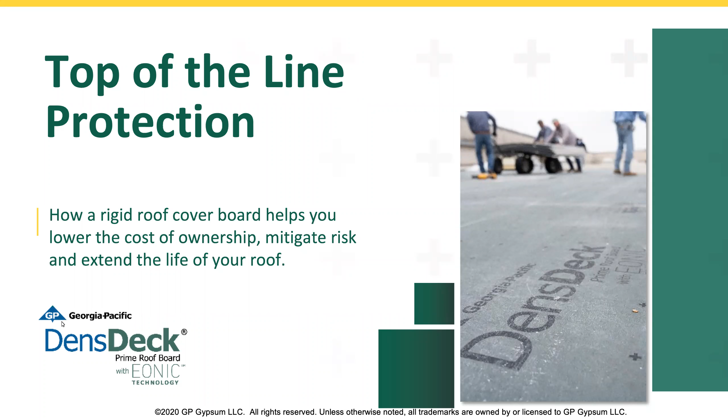So being a facility professional, whether you're a building owner or facility manager, is not an easy job. You got a lot on your plate. You have to prioritize resources and expenses on a daily basis. You got to deal with and worry about budgets, people, maintenance, all utilities, janitorial, training, uniforms, vehicles, capital projects, complaints from tenants. The list goes on.

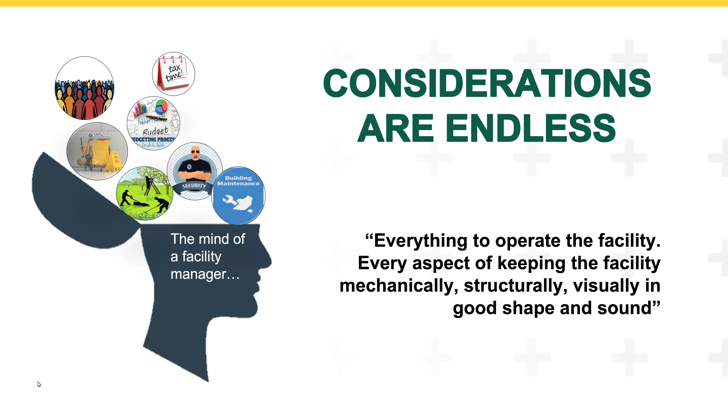And you even have to worry about that next storm that's forecasted to hit, depending on what's the state of your roof that you're managing. So you got to balance all these things while also ensuring that there's no disruption in the operation or the daily life of anyone in your facility. Definitely not an easy task.

So our Gypsum Insights group recently conducted a series of conversations with facility managers from across the United States with varying levels of asset responsibilities. Some of these guys oversaw individual buildings or a couple of buildings, while others directed massive medical and university campuses. So the quote on the page we thought was pretty interesting because it was from one of those conversations with a facility manager of a large university campus in the Chicago area.

So he said, if I blow my budget, then I'm going to be fired. In my life as a facilities executive, if I impact our students or our ability for faculty to deliver academics, then I'm going to be fired. If I impact our researchers and damage an experiment because something went wrong in the building environment, then I'm going to be fired. Those are givens with everybody in my role. We all understand that. So we thought this statement, while being perhaps a bit extreme, gave a really good glimpse into what keeps facility managers up at night.

So in our conversations with these facility professionals, the feedback they gave to the topic of, quote, what keeps you up at night, can be broadly summarized by the words on the page. And, to summarize, it's things such as managing and staying on budget, thinking about their workers and the labor that they have, whether it's around their safety and how they work, as well as just the problem of finding skilled labor. And then big categories, things that can affect the structural soundness of their buildings, such as water, fire, and weather-related events.

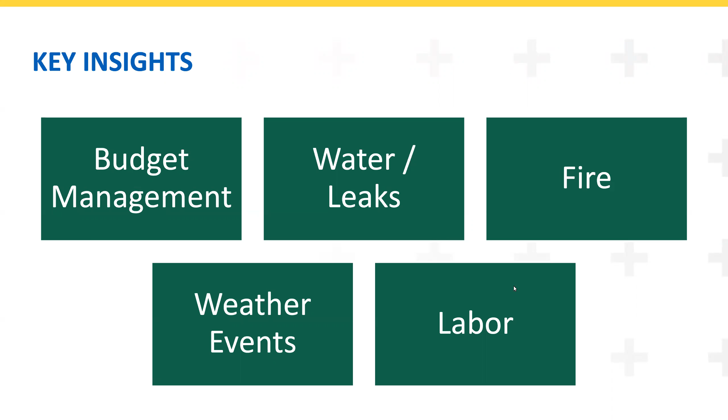So as I mentioned when we started, we want to spend some time talking about the roof of your buildings and sharing information about how using a cover board can be a benefit to give you peace of mind and help you address some of your concerns, at least when it comes to your roof.

So in addition to conversations with facility managers, early this year, Georgia Pacific partnered with FMI Corporation to conduct a third-party assessment of roofing systems that have been replaced in the last 5 years. What the data showed was that when compared to similar roof systems with a cover board, single-ply systems that did not have a cover board had anywhere from 35 to 65% higher annual operating and maintenance costs.

They had more issues over the life of the roof, and when those issues did surface, they were often significantly more expensive to fix. We'll touch on this subject a little bit more when we get to the benefits versus cost section a little bit later.

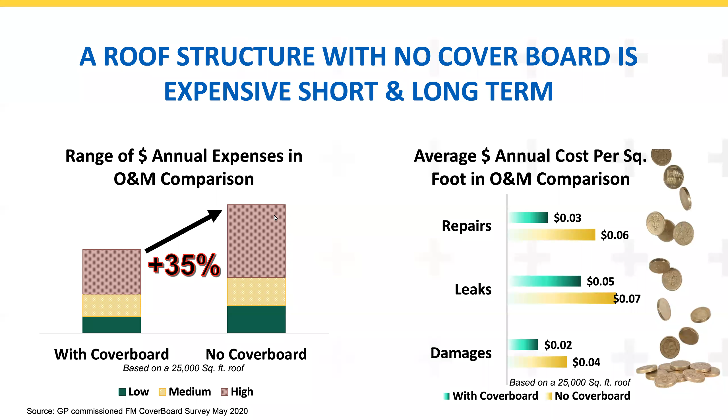So in addition to operating and maintenance costs, some other future considerations you might want to keep in mind for your next roofing project, whether that's a re-roof or a new building, are things like future weather hazards. We'll talk a little bit more about that in the next few slides. Do you plan to add additional HVAC equipment or solar panels to your roof? In other words, will you be increasing maintenance traffic or adding additional equipment hazards to the roof?

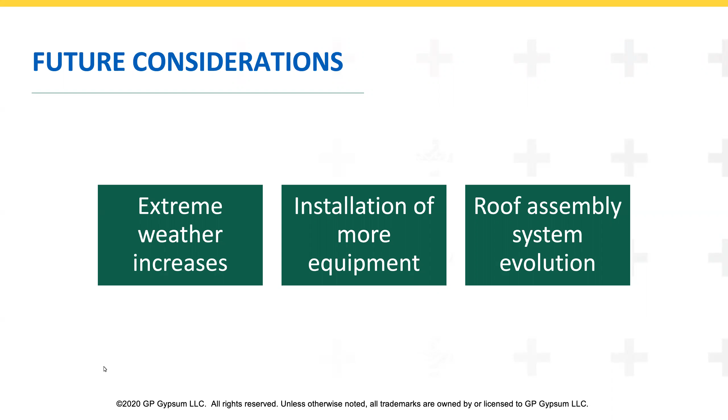And any future considerations for converting roof space into things such as plaza decks, outdoor entertainment areas or garden areas. If you have any of these future considerations, then a cover board should be a consideration that you're looking at as well.

One of the topics that regularly came up when discussing what keeps facility professionals up at night is weather events. Extreme weather and weather-related disasters seem to be a regular occurrence on the news these days. We're always hearing about unprecedented this and unprecedented that. But if we look back, since 1980, the U.S. has sustained 258 weather and climate disasters where the overall damage costs reached or exceeded $1 billion, which is how they define a disaster. The cumulative cost of these events for the past 40 years is around $1.8 trillion.

So $1.8 trillion, but in the last 3 years, disaster costs were up 43% versus the previous 5-year average and up 76% versus the 20-year average. Disaster costs from just the years 2017, 18, and 19, so just 3 years, account for over 25% of the disaster-related costs going back to 1980.

These disasters have impacted states across the country, in addition to U.S. Caribbean territories. In a recent report on disasters since 1980, NOAA concluded that the number and cost of disasters are increasing over time due to a combination of factors. Things such as exposure, which is the value at risk of possible loss. So you have more valuable assets that are in the way of these storms.

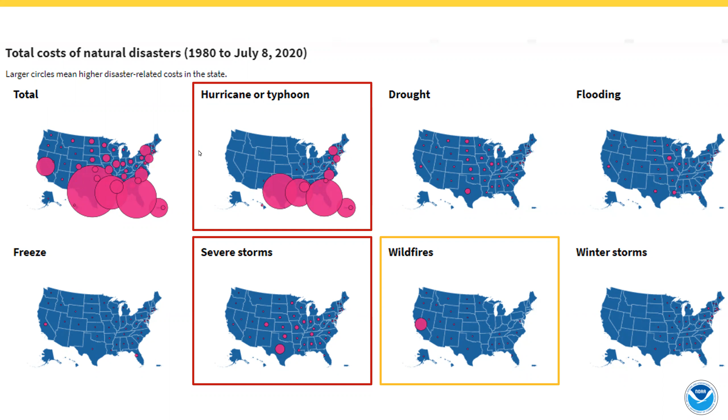So NOAA, like I mentioned, only tracks disasters that cause at least $1 billion in damages, which is why we've been talking about them. So again, talking about this trend that's been developing in the last 40 years, you can see that the number of billion-dollar events continues to grow. So since 2002, there's not been a single year with less than 5 major natural disasters. And since 2015, there's been at least 10 major disasters recorded each year.

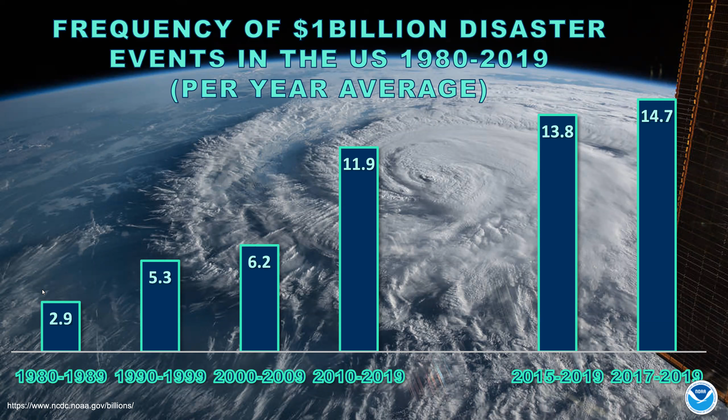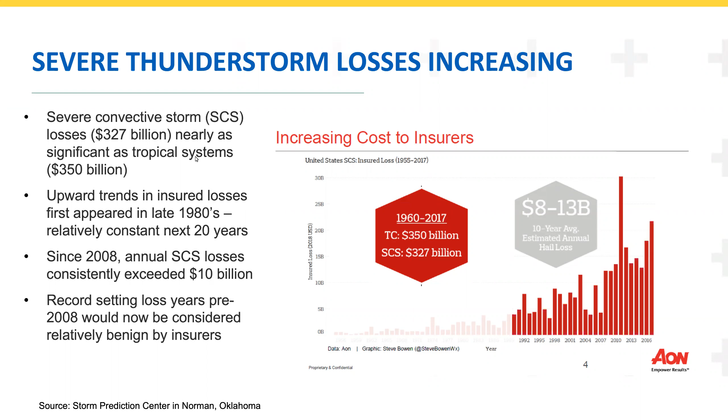So as you can see on the chart, insured losses for severe convective storms have been following in step pretty well with the increased frequency that we've been seeing of billion-dollar weather events occurring in the United States. If you look closely at the chart, you'll see that since 2008, annual losses for severe convective storms have exceeded $10 billion per year. So you may not be in the bullseye for tropical storms, but severe storms cause disasters in virtually every state.

So this is an update on where we're at in 2020 for billion-dollar disasters. As of October 7th of this year, there have been 16 weather and climate-related disaster events with losses exceeding $1 billion to impact the U.S. 11 of those were severe storms, including one derecho, which I had never heard of until this year, that devastated Iowa. And then there were 3 tropical cyclone events, Isaias, Laura, and Sally, that impacted the Gulf and the Atlantic coasts. And then, as if 2020 had not set enough records, the 16 events that occurred in the first 9 months of the year tie the record of 16 events that occurred in 2011 as well as in 2017.

So in this latest update for 2020 from NOAA, they summarize that the current disaster season further supports elevated activity that's been seen in the past few years when it comes to disasters, indicating that this appears to be part of a larger upward trend. And another thing they concluded was that the data strongly suggests that natural disasters are increasing not only in frequency, but also in price tag.

So many of the risks to your roofing system that are associated with these disasters can be mitigated or at least significantly reduced with the use of a rigid cover board. Adding a rigid cover board to your roof system will enhance the strength and durability. It can add resiliency to your roof for when the next disaster strikes.

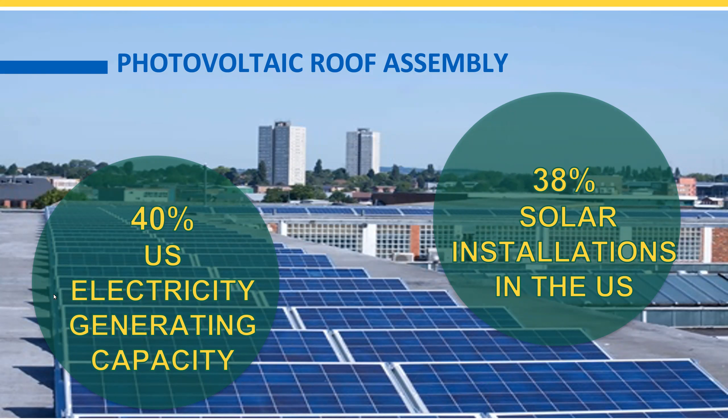So 40% of all new capacity that was added in the U.S. in 2019. And thus far in 2020, in the first half, it's been 37% of all new electric generating capacity that's been added. So of that new solar capacity that's been added, 38% of that is non-residential. So what they're looking at right now for 2020 is roughly 1 gigawatt of solar that's being added. So the non-residential would be about 380 to 385 megawatts.

So in total, the US solar market will be installing nearly 100 gigawatts of additional capacity in the years 2021 to 2025, which is 42% more than was installed over the last 5 years. So in other words, 40%, 42% more, it's growing. In other words, it's growing exponentially.

So by 2025, the other new development that's happening is solar energy storage, because that's always been an issue. You're only developing energy when the sun shines. So by 2025, it's now expected that 1/5 of new PV systems, 1/3 of residential solar systems, and up to 1/4 of new non-residential systems will be paired with energy storage, which is a game changer for solar, since, like I said, you can obviously only generate this type of power when the sun is shining.

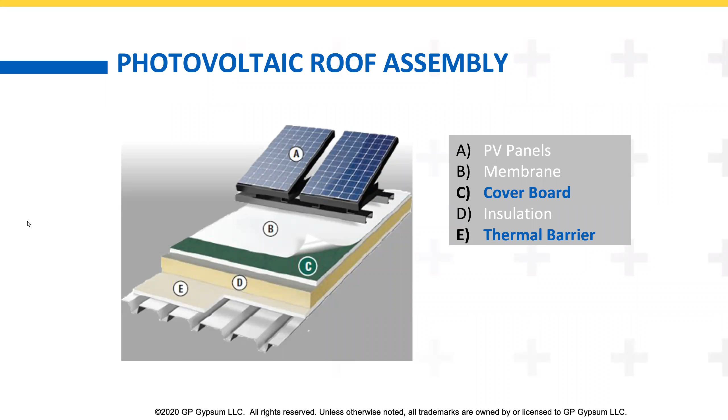So although PV solar systems are a great source of renewable energy, there are definitely hazards associated with placing them on a roof. And these hazards primarily include fire, how these panels react to wind, and then structural considerations for the weight of the panels themselves. So this results in several design-related challenges. By using a gypsum-based cover board and thermal barrier, it can really help in designing a roof assembly that meets the needed fire and wind uplift specifications for these types of systems.

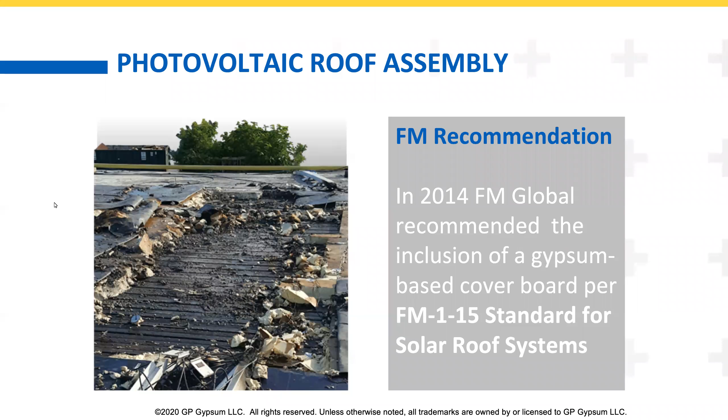So when they re-roofed to accommodate this massive system, they did include a half-inch glass mat gypsum board as a cover board to provide extra compressive strength, durability, and to enhance the fire resistance. So an additional consideration for this roof was the extra cost that would be associated with potentially having to remove portions of this PV system if they had to accommodate any kind of unscheduled roof maintenance or repair.

So they did not want to have to go through that. So they actually brought in two separate roof consulting firms to partner together in an attempt to design a roof assembly that was virtually maintenance free and would have a lifespan that would be comparable to the PV system. So those consulting firms both agreed that a rigid cover board was needed for that system, and that's what was installed.

So vegetative assemblies. So vegetative roof assemblies continue to grow in popularity due primarily to their ability to increase energy efficiency. They're very good at managing stormwater discharge. They reduce operational costs of the facility. They can enhance the visual appearance of the building. And they also help the building owner position themselves as being an environmentally friendly organization, not only to their community, but also to their employees.

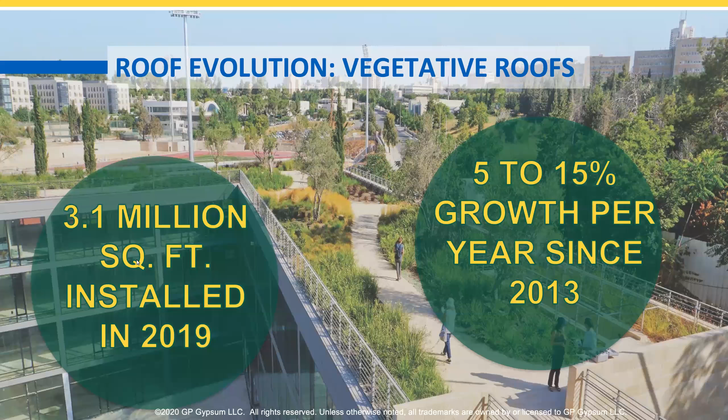So current long-range analysis has indicated that there's been a 5 to 15% overall growth industry trend since 2013. Apparently that's not very clear to measure, but most consider that 5 to 15% growth is a conservative estimate. And so the top 10 areas for green roofs: number 1 is Washington, D.C., number 2 is Chicago, number 3 is Toronto, 4 New York City, 5 Seattle, number 6 is Vancouver, number 7, who would have known, South Bend, Indiana, number 8 is Boston, 9 Philadelphia, and number 10 is Baltimore. So that's where most of the green roofs are getting installed in recent history here.

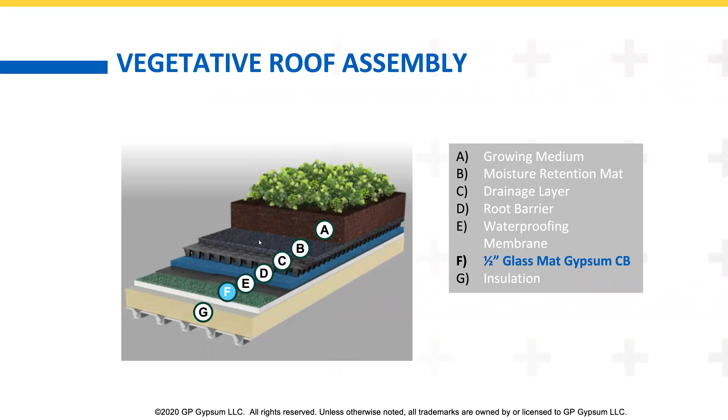So now let's look at low slope roof design basics. So roofing, it's a big investment, and it protects an even bigger investment when you consider the contents that are under the roof and the building itself. So these are really good reasons why durability in any roofing system is so important, because it directly translates into lower total cost of ownership, not only for the roof, but in some cases for the building.

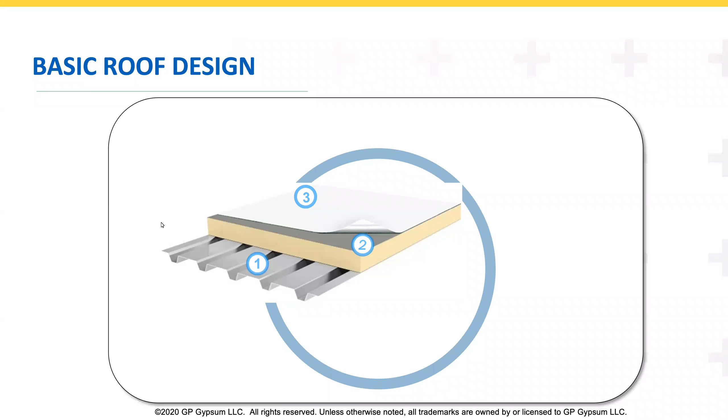So if we look at basic roof design, as a facility professional, you need to be aware of how to increase the durability of your roof system, because this can help you make more strategic decisions instead of being reactive to problems in your roof and in your building as they come up. So basic roof design has 3 main elements. First one being the structural deck. You've got different material options there that can be steel, wood, concrete, poured gypsum even, not so common these days.

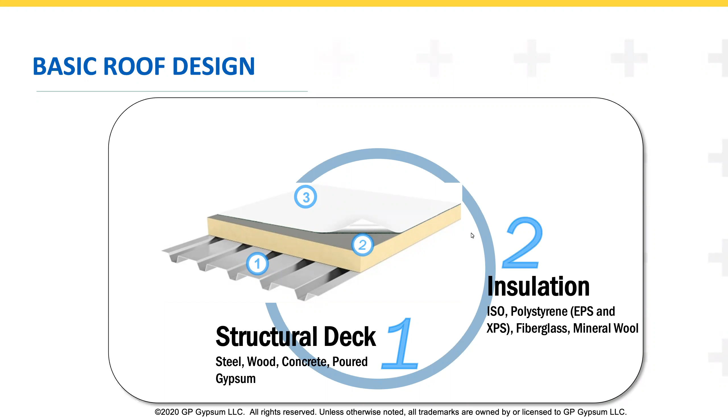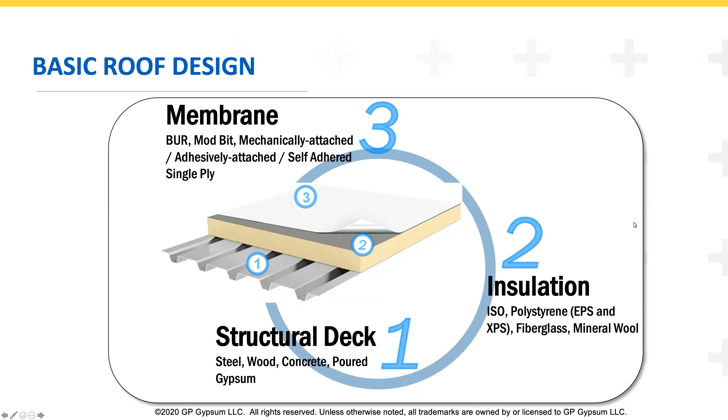Number 2 of the main elements is your insulation. Again, you have options for material choices, but polyiso is the most common today in commercial roof systems. And then number 3 is the membrane, which is your waterproofing layer. And again, you've got lots of different options for what you can use there, but single ply membranes are the biggest growing and the majority of what's being installed in roofs today.

So what is a cover board? So a cover board goes by a few names, but it's installed below the waterproofing membrane and above the insulation. So the purpose for it is it provides support for the membrane, but it also protects the insulation below, which is very expensive, from storms. It also protects from maintenance workers, whether we're thinking about dropped tools or wear and tear caused by them walking around in their boots. But the most important thing it does, it minimizes deterioration of other components in the roof, and that ultimately extends the life of the roof.

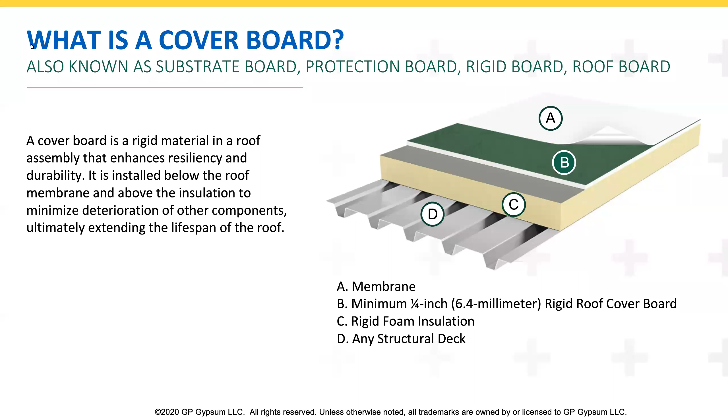So cover boards do come in different material types, but most commonly seen today are glass mat gypsum board or high density insulation boards, but there are also cement boards and asphaltic boards and some other options that are available out there.

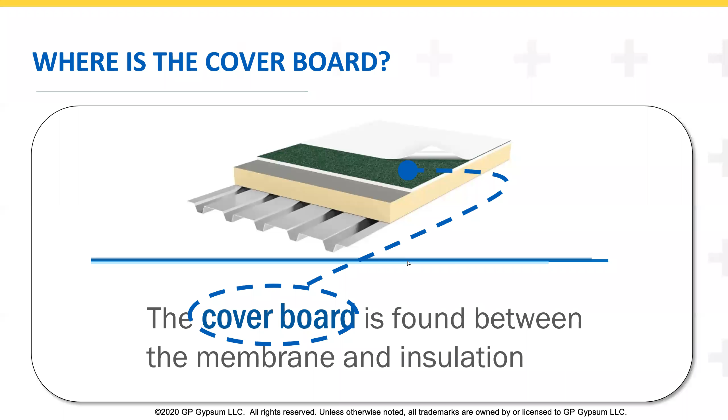So where is it? I already mentioned a little bit. The cover board is located between the membrane and the insulation, and it enhances the overall performance of the system. As I also mentioned, it provides a nice rigid base to support the membrane. And the reason that's important is because when that membrane is adhered, so we call it adhered systems, it provides a great bonding surface for the membrane to stick to, one that doesn't flex and provides a lot of support for the membrane.

So gypsum cover boards and roof boards are often used directly over the structural deck and under the insulation as thermal barriers. In this location, they provide fire resistant benefits to the roofing system and make excellent substrates. So again, substrate, think foundation, or if you're using an air or vapor control layer in your roofing system, otherwise known as air barriers or vapor retarders, these are often directly adhered to the gypsum board in this position down in the thermal barrier.

So you can see in this image, the black membrane there would be your vapor barrier, air barrier. That would be over the substrate board or thermal barrier. And also in this image, you can see that there is a gypsum board in both the cover board as well as the thermal barrier positions, with the green board at the top being the cover board.

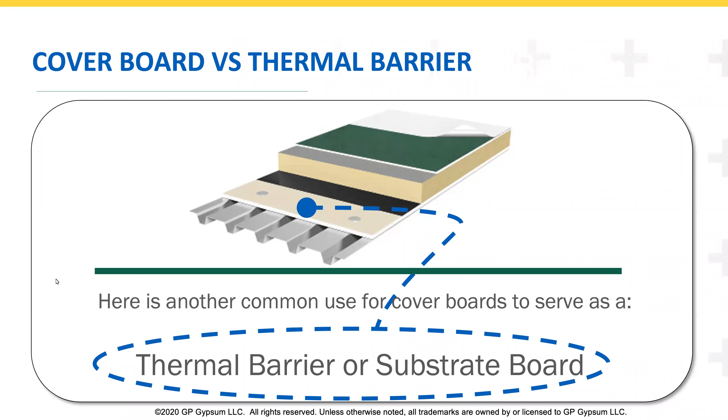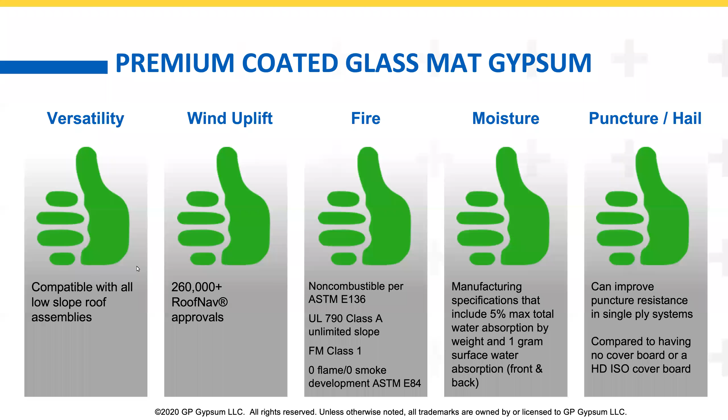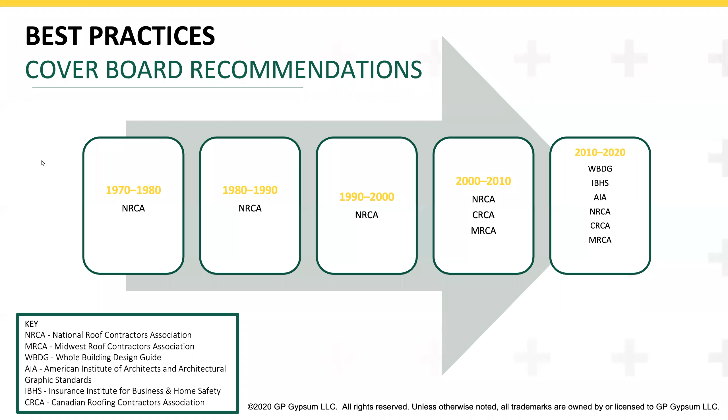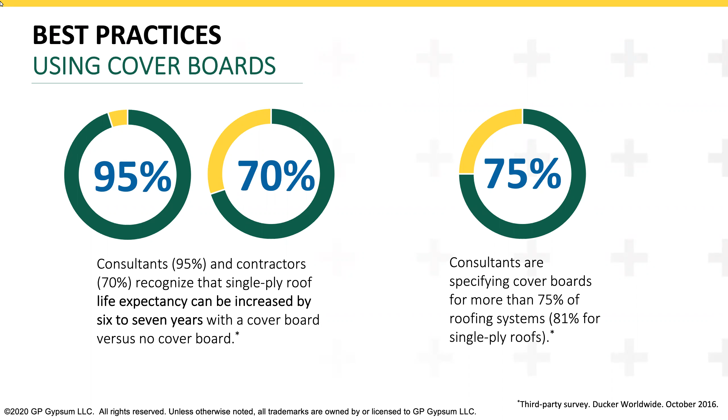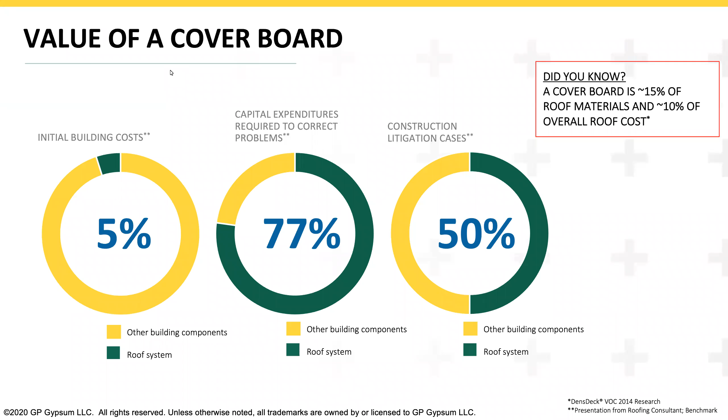We've got an interesting quote from Robert Bensini, an attorney specializing in construction litigation. He estimates, quote, a full 15% of all new roofs fail within their first 6 years of service. These figures are a sober testament to the industry's preponderance of bargain basement generic roofing materials, sloppy installation, and ignored maintenance. So the key takeaway is spending a little more money on a good roof can save you a lot of future construction-related headaches.

You may have insurance considerations. Many companies require FM approved roof systems. FM Approvals was formerly part of FM Global, which is a company, and then FM Approvals branched off and became essentially a roof testing organization that helped inform their insurance company. Today they're the de facto approval organization for roofing, and a lot of companies require systems that are approved by FM.

FM classification is primarily concerned with roofing loss prevention issues, such as fire, wind uplift, foot traffic, and hail damage. As I mentioned, cover boards are listed in hundreds of thousands of FM approved assemblies. Typically these are specified, and you can see from the loss prevention sheets that they reduce risk for those issues, primarily fire, wind, hail, and foot traffic.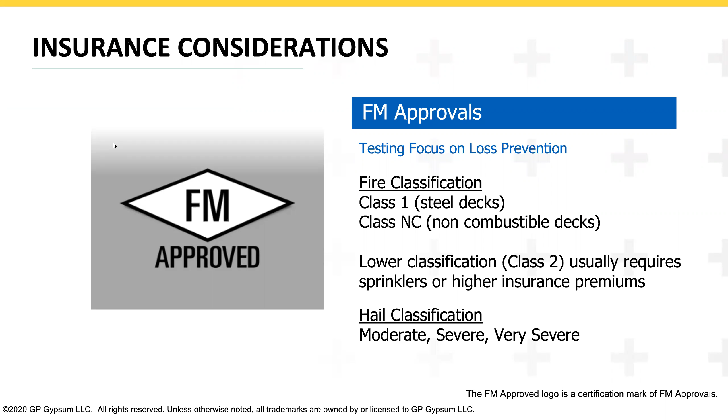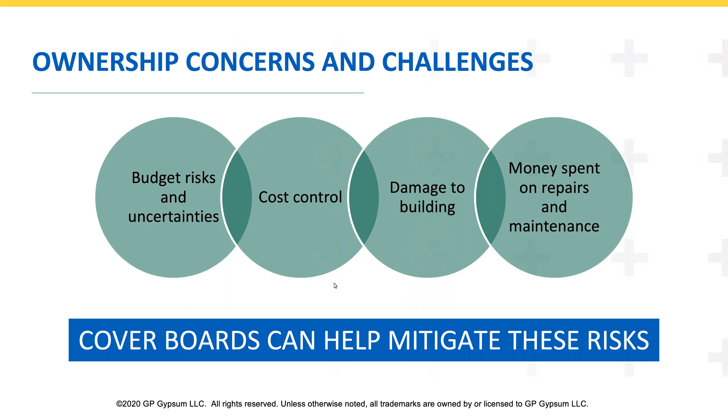So why use a cover board? We've given a few reasons, but let's go back to where we were in the beginning. These are some of the key insights we got from facility professionals on their concerns and challenges: how do I stay within my budget and control my costs, unforeseen money spent on repairs and maintenance, and weather-related damage to the building. As I've been showing you, cover boards can help mitigate many of these risks.

So again, why should I use a cover board? It's typically an extra step in the roofing process, it does add cost, and it's typically not required. But the truth is the benefits a cover board brings to your building far outweigh the initial cost, and it extends the life of your roof. So if any of these benefits on the right side of the page sound like something of interest to you, consider a cover board for your next roof. We'll get into this a little more.

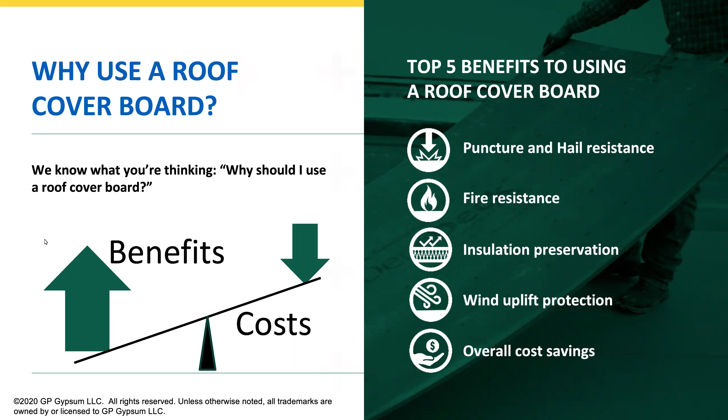Looking a bit more at these categories of cover board benefits, here you can see some of the risks mitigated by including a cover board in your assembly. Under puncture and hail, cover boards increase the puncture resistance of the system, and they help protect the membrane and the overall assembly from things like maintenance foot traffic on your rooftop. The other big puncture category is risks like hail.

Under insulation preservation, cover boards protect the insulation from foot traffic and weather conditions, help preserve the insulation R-value and energy efficiency, and prevent the insulation from being crushed or damaged. Foot traffic is most often the culprit there.

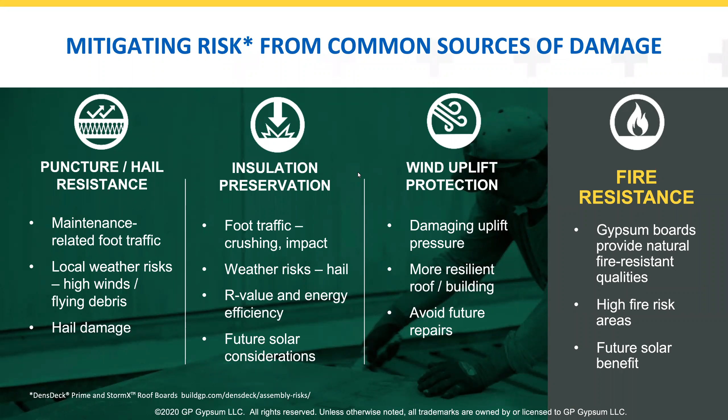Wind uplift protection. Cover boards enhance the roof's resistance to wind, and high winds can literally lift your roof off the system, which is why it's called wind uplift. Those are definitely expensive repairs you'd want to avoid. And then fire resistance, an important consideration in just about every building. Gypsum boards provide a natural fire-resistant layer in your system. We'll talk more about that in a minute. Next, looking at benefits versus cost.

So again, earlier in the presentation, I mentioned the third-party assessment that was conducted by FMI Corporation, where we looked at single-ply roofing systems that have been replaced in the last 5 years. The study concluded that using a cover board on a single-ply roofing system could save anywhere from $30,000 to $55,000 on maintenance costs over 20 years.

So in this study, detailed roof data was collected from owners, from facility managers, as well as from property managers. The roof data, like I mentioned, was specific to single-ply membrane systems. And in those systems, roughly half of those included a cover board in the assembly and the other half did not. So in total, quantitative data was collected on 123 roofs from 38 states.

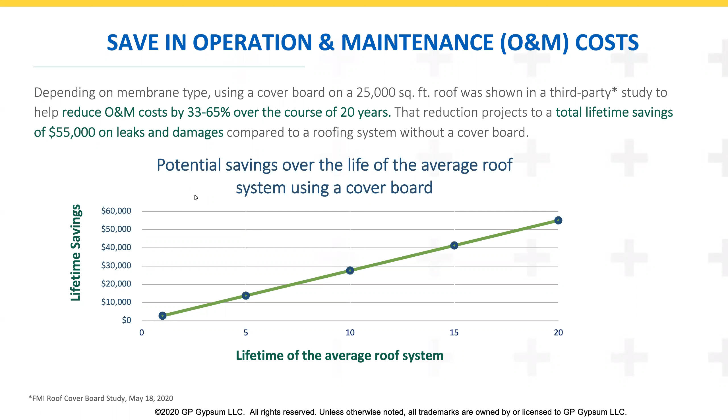So another interesting conclusion from the study was that roofs with a cover board were far more likely to meet the owner's life expectancy for the roof. Of the roofs with a cover board that did not meet owner's life expectancy, which there were 8 of, 4 of those actually surpassed the warranty life.

So if those had been included in the numbers, then 93% of roofs with a cover board would have met life expectancy. That would be a pretty good batting average, especially compared to roofs without a cover board, where just over half met the owner's life expectancy for the roof. And on average, another takeaway from the study was that roofs that included a cover board lasted approximately 4 years longer than systems that did not have a cover board.

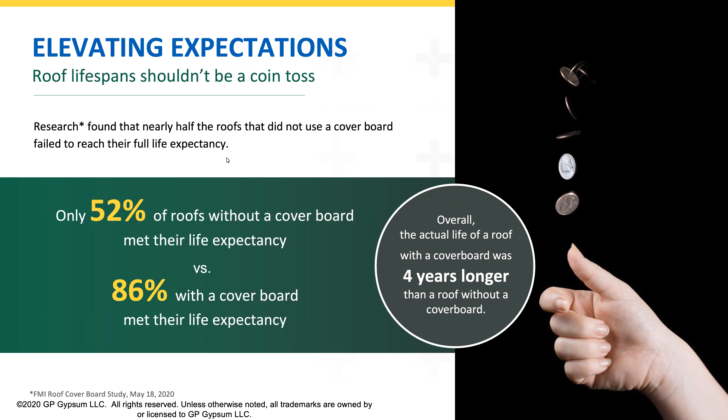So the FMI study concluded that the use of a cover board provides several advantages, especially in single-ply roofing systems, both from a financial perspective as well as part of just a good risk mitigation strategy. The key factors that led to these conclusions were, number one, extended lifespan. Systems with a cover board experienced roughly a 20% longer life. And they were also much more likely to meet the life expectancy requirements that the building operators had in mind.

Number two is reduced risk profiles. Roofs without a cover board have the potential to experience over 50% greater annual costs associated with damages, leaks, repairs, and even regular maintenance. Cover board equipped roofs also experienced less impact from foot traffic on the roof surface and less damage from other sources as well.

And number three was lower life cycle cost. So even though the initial installed cost of a roofing system with a cover board is more expensive than it is without, the total life cycle cost is actually considerably less. Roofs without a cover board experience increased and often highly variable annual operating costs depending on what kind of problems may be going on, and they generally have lower lifespans. So these are the two big contributing factors that lead to total cost being considerably greater for a roof without a cover board, even though the cover board costs more initially.

So looking at performance, we'll look at why cover boards are your roof's best friend when we're talking about puncture and hail. Punctures on a roof system are one of, if not the most common problem that's encountered on a low slope roof. They can happen during building or roof construction, due to ongoing maintenance traffic on the roof, as a result of storms or weather, or even poor installation of the roof.

So the building in this picture shows a roof area that's being used to stage quite a few products. When you look at this and ask yourself, could there be an elevated risk for roof damage or puncture when you've got all this equipment up there and a lot of people working on it, you bet there's going to be an elevated risk, whether this is a roof that's being constructed or whether they're doing projects within the building.

There's always risk when you have workers up on a roof, whether just doing a capital project or installation, or whether they're just up there servicing equipment on the roof. So risk is definitely elevated during roof construction in a situation like this, but it's a risk anytime a roof is used to keep equipment or have people up there for any reason.

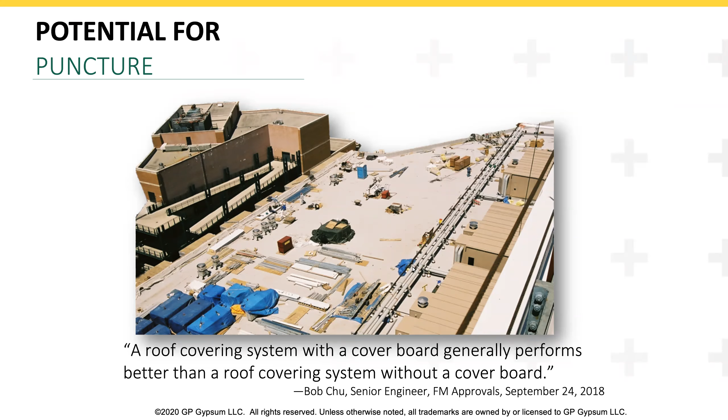So cover boards, like I said, they definitely help protect your roof system from punctures. Here you can see some of the common causes for punctures on roof systems. Again, like I just said, foot traffic and human caused punctures are by far the most common.

These punctures are often found where maintenance workers access the roof. So if there's a roof hatch or an access door, typically at those entry points, and then also where they typically perform their work or set their toolboxes down. So if there's HVAC equipment or some other equipment up there, that's often where punctures will be found.

Hail, that's the one that most people know to be afraid of if you've ever experienced a serious hailstorm, or if you're in an area that gets hail on a regular basis. So in addition to hail, we don't have it on here, but windstorms can also cause punctures from flying debris, and they can even dislodge HVAC or solar panels.

And dislodged equipment on the roof is actually a very common cause for punctures when you experience a high wind event. And just to summarize again, cover boards can enhance the puncture resistance of your roof assembly and mitigate many of these risks.

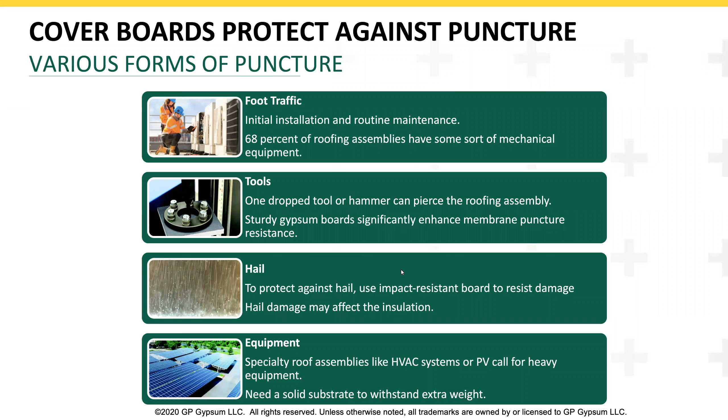So this data is on rooftop equipment from the Department of Energy's 2012 Commercial Building Energy Consumption Survey. So what they concluded was that 2 out of 3 low-slope roofs host some sort of rooftop equipment, whether it's HVAC or something else. That means that maintenance, service calls, regular inspections, these all create foot traffic on your roof.

So many of these folks that go up there, they're not even aware of the wear and tear, not to mention the potential damage that's caused by, whether it's just their boots walking around, if they're not walking off footpaths that are reinforced, or if they set their toolboxes down, or if they drop tools or pull panels off of HVAC units. We've heard from waterproofing repair experts that those are common areas where they put panels down onto a single ply membrane and they set them down a little too rough and cause punctures.

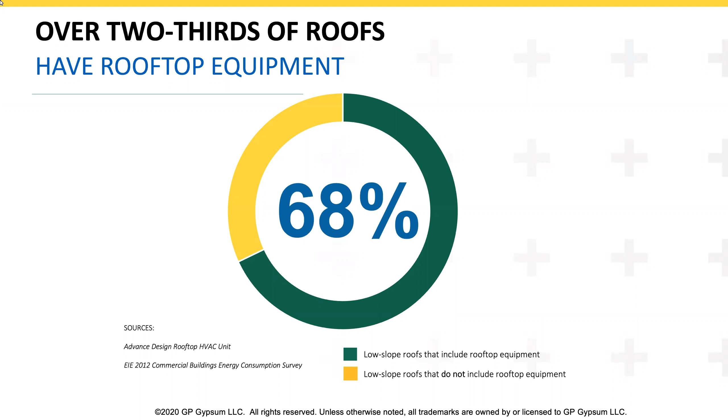But so again, maintenance related punctures, very common. Rigid cover boards increase the puncture resistance of your waterproofing membranes, and that can help mitigate this risk of this increased traffic with increased equipment up there.

So this image gives a nice visual on what you can often see on rooftops with maintenance-related foot traffic. The black dotted line is the reinforced walk path. That's the way you'd want folks to go, but unless you're going to work on the equipment in that top right corner, the guy's probably not going that way. Tools are heavy. Guys may have had to walk up a few flights of stairs to get up there. So they're likely going to be looking for the shortest path.

So, for instance, the red dotted line would be the shortest route for a guy if he's heading to that large cream or rust-colored box that you see there and whatever equipment's in there. And from what we've seen, human nature shows that's the way he will go. So extreme weather may not be a major risk factor where your building is, but people accessing your roof are always a significant factor regardless of your location. And if you have a lot of equipment on your roof, your risk increases substantially.

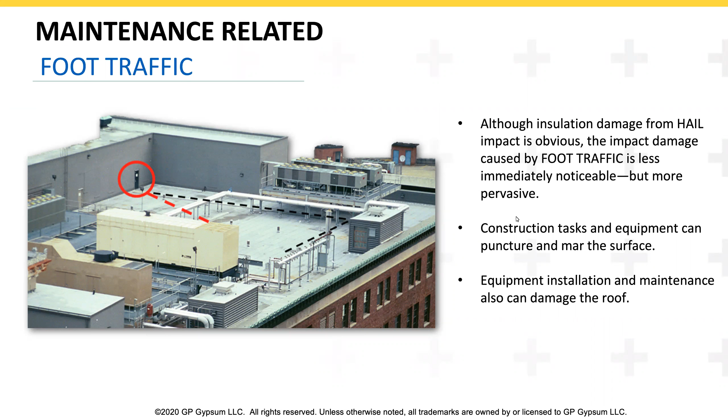So depending on where you live, hail may or may not be a significant risk factor for you. So roofing systems insured by FM Global, or these days a lot of roofs are just designed to meet FM requirements even though they're not insured by them, must use tested and classified systems that meet one of these 3 categories that FM defines as moderate hail, severe hail, or they have a new category of very severe hail right there in the center of the country.

So if you're in that dark gray area on the map, you may be at elevated risk of encountering what FM Global refers to as very severe hail, and you may want to look at installing a very severe hail rated system for your next roofing project.

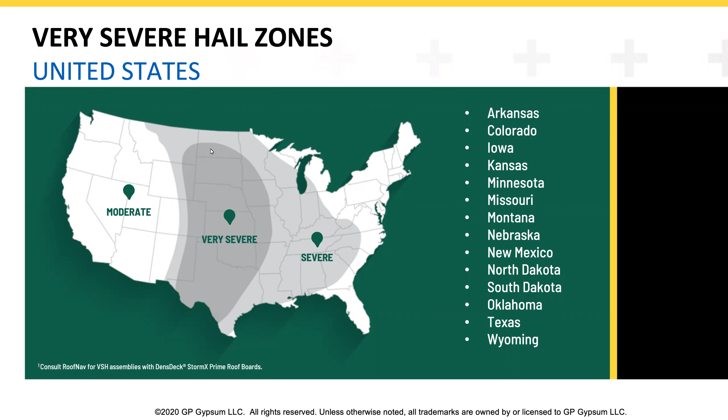Just to put in perspective what these different moderate, severe, and very severe hail resistance classifications mean, sort of to put a visual to it. So this shows the different levels of hail resistance relative to the diameter of the hail ball. So the quarter is roughly the moderate hail, golf ball would be roughly the size of severe hail, and then the 8-ball would be your very severe hail.

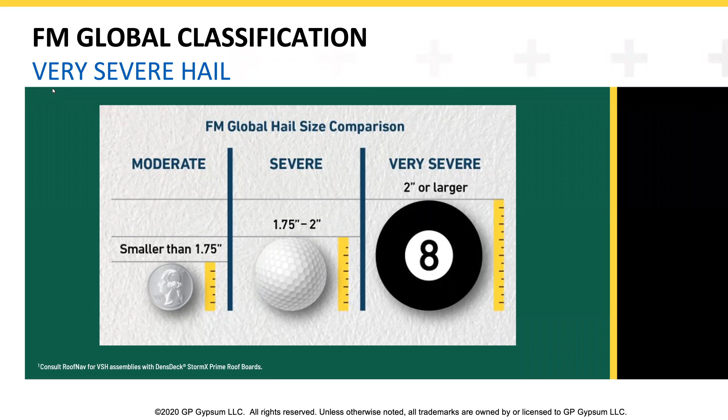So most very severe hail rated systems, and it could be all of them from what I've been able to see, do include a cover board to meet that level of resistance. By including good rigid quality cover board in your system, hailstorm concerns can be something that becomes much less of a concern or a thing of the past for you.

So fire resistance. This is hopefully a less frequent, but potentially very catastrophic event: fire. So the fire resistance of your roof assembly is always important, and it can be enhanced by cover boards and thermal barriers.

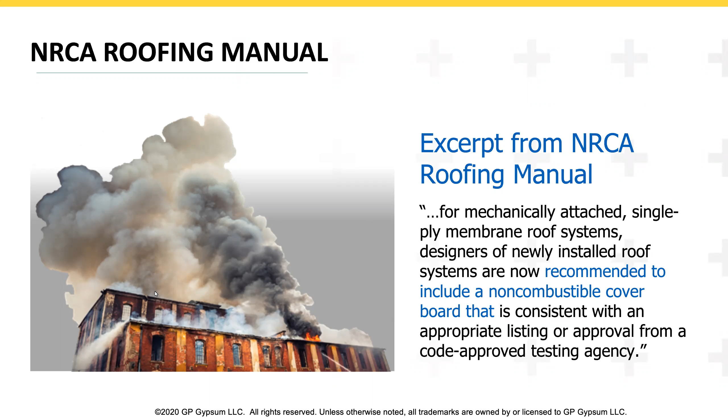So we mentioned the best practice call out by the NRCA since the 70s. So the NRCA, again, National Roofing Contractors Association, recommends the inclusion of non-combustible cover boards. So non-combustible, think that means won't burn, for mechanically attached single ply roof systems. So glass mat gypsum roof boards and cover boards are today, and really have been for the last 30 years, considered the premier non-combustible roof board.

So what's so special about gypsum? So a lot actually, but the real magic is how gypsum resists fire. So gypsum, by molecular structure, contains 2 molecules of water for each molecule of calcium sulfate. So it literally contains chemically combined water. So what that means is the gypsum will slowly release these molecules of water as steam or water vapor if it gets heated by a fire.

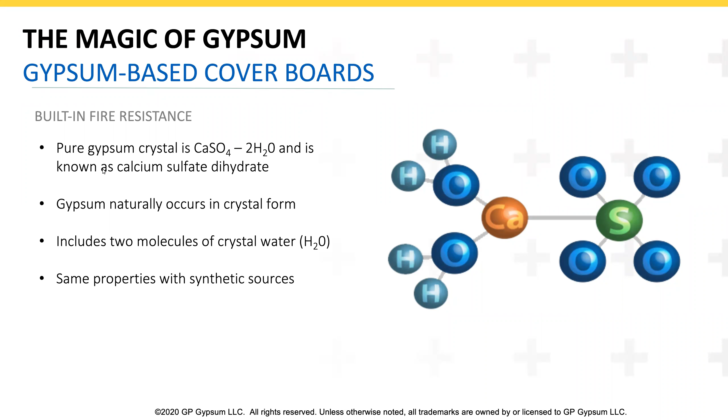So it'll continue to do this, and it'll release all that water, as long as it's being exposed to the heat of a fire, until no water molecules are left. So this is what provides gypsum's unique ability to resist fire and flame. So I mentioned it's naturally fire resistant and non-combustible. Again, gypsum won't burn. So what's interesting here is those 2 water molecules that we just talked about actually account for 21% of the weight of gypsum.

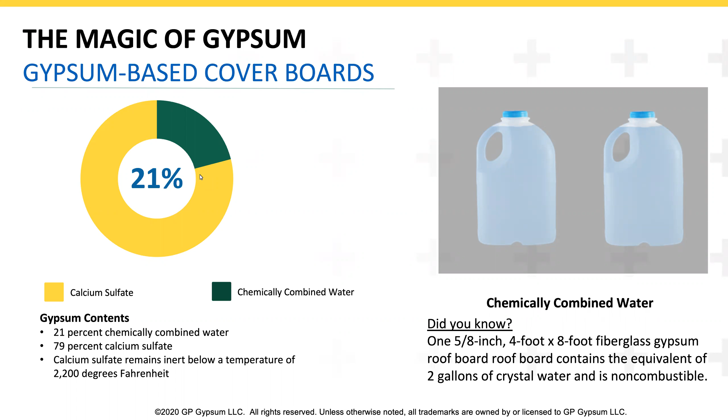So to put that in perspective, if you look at a 5/8 inch 4 foot by 8 foot gypsum panel, it contains the crystallized equivalent of 2 gallons of liquid water. So you sort of have a little bit of built-in fire resistance in your gypsum panels. And that's the magic of gypsum.

So roof boards, like cover boards and thermal barriers, provide 2 different kinds of fire resistance, and that's primarily driven by their location in the roof assembly. A cover board provides fire protection from outside sources. So think burning embers from a nearby building that's on fire, or if you've got a forest fire that's spewing up embers and they're landing on buildings that are in the area. This is where a cover board will help prevent your roof from catching fire from these sort of things.

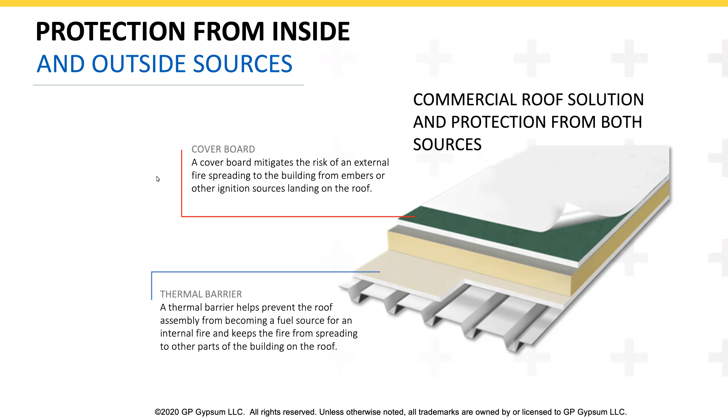And then gypsum thermal barriers provide fire resistance to the roof assembly itself, to protect from fire within the building. So if you have a building fire within, it ensures that your roof assembly won't contribute fuel to the fire.

Next, we'll look at wind uplift. Cover boards do provide significant benefits to roof systems in high winds. So cover boards strengthen the roof assembly, and by doing that, they enhance the uplift resistance. They also provide a great bonding surface for the waterproofing membrane, which helps reduce delamination risk.

They increase the stiffness of the overall roof structure. They add structural integrity to the system. And as mentioned before, they help protect against punctures. So again, things like flying debris, tree branches, or rooftop equipment that gets dislodged.

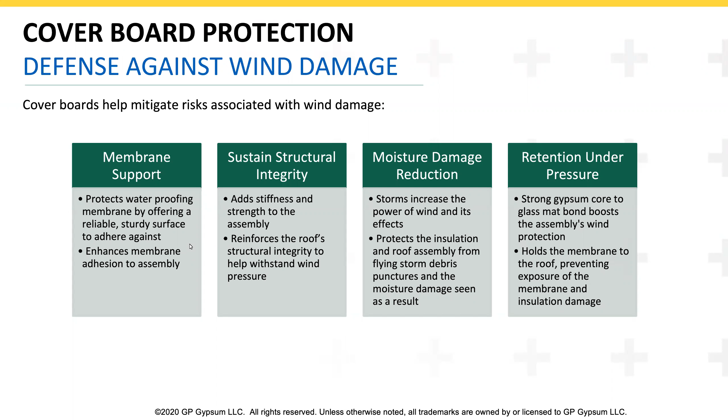So compare that to the New Orleans Arena, which used a glass mat gypsum cover board and did not experience any noticeable damage. So is this a completely fair comparison? Of course not. So even though both of these roofs experienced the same storm, the Superdome is a much larger roof surface. It's at a different pitch, it's at a different height, and it had a different type of roof system on it.

But the contrast and the level of damage is just so stark when you look at these two buildings that it stands as a great visual representation of how a gypsum cover board can enhance the roof assembly's wind uplift performance.

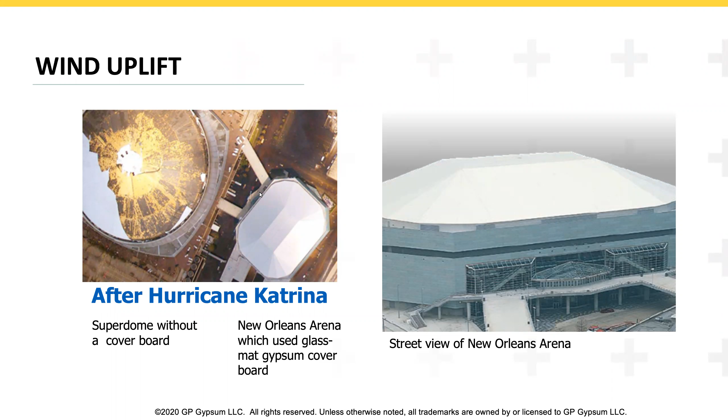So looking at sound, acoustics, and sound transmission can also be enhanced by using gypsum cover boards. And higher density cover boards like glass mat gypsum panels provide enhanced acoustic benefits to pretty much any roofing assembly. So although sound transmission properties of a roofing system are not really part of the physical protection of the roof, sound transmission does affect the quality of life inside the building. So reducing the noise from traffic, equipment, and aircraft noise can be a vital function of the system.

So by adding one or more layers of a high density material into your roof system can really help attenuate and absorb these outside noises, and it can help significantly increase the STC or the sound transmission class of your roof assembly. So gypsum boards and mineral wool insulation are commonly used either separately or in combination for especially enhanced acoustic performance in roof systems. They do this very well due to their density and their sound absorptive properties.

So these are other considerations if you're looking to meet a sound transmission class or looking to reduce the noise inside of your building because of outside noise sources. Looking at cover boards and especially gypsum or other high density boards can really enhance the sound performance of your roof. So if you look at how they're designed and even how STC is calculated here, adding high density boards can increase the sound isolation.

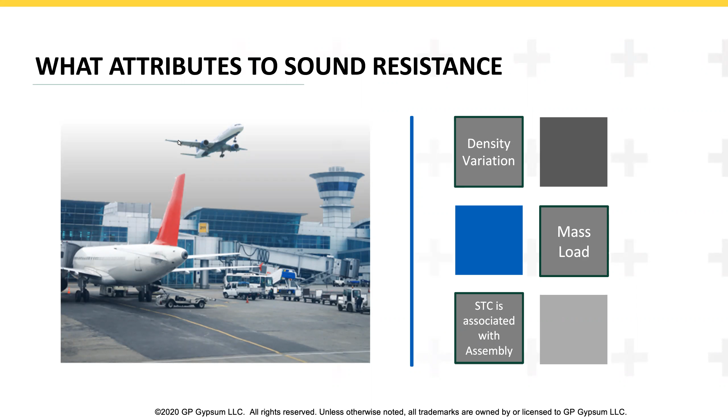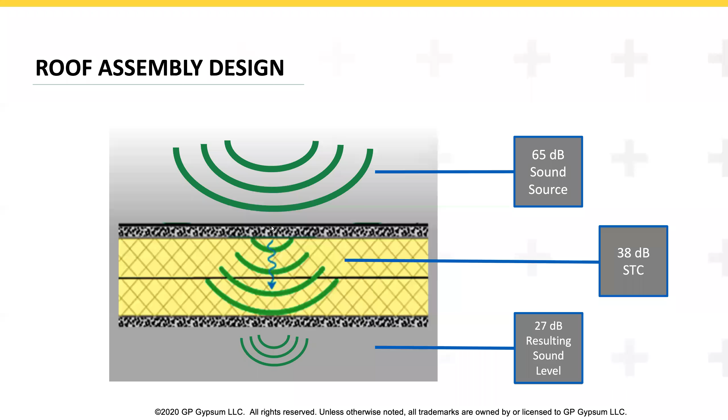So if you wanted to increase that 38 STC, this is where you would change materials or add materials to your roof assembly by going with higher density materials, whether you're adding more layers of high density boards or going with a more dense insulation like mineral wool, you can further increase the STC of your roof assembly. Oh, actually, this is the image that I meant to be showing here, but this is where you can see the 38 STC coming from 65 minus 27. Apologize for that.

Moving into insulation preservation. So insulation, it's used in roofing systems. It typically has a life expectancy of around 50 years. Most roof systems last anywhere from 15 to 25 years. So you don't have to be a math wizard to figure out that you're going to go through multiple roof systems during the potential life cycle of your insulation. So since your insulation is the most expensive component in your roof system and has a life expectancy of at least 2 to 3 systems, it definitely makes a lot of sense to protect it and preserve it for use in more than one roof assembly.

So insulation in most roofing systems today is typically polyisocyanurate, but it could also be things like expanded or extruded polystyrene or even mineral wool. And like I've said, it is the most expensive component. It has a life expectancy of roughly 50 years. Roofing systems last much less than that. So insulation, if it gets damaged or it gets wet, it must be replaced when re-roofing. So if that happens, that increases the cost of replacing your roof. On the flip side, if you keep it in good shape and protect it, it can be reused, which will help reduce the cost of your re-roofing project. So again, a 50-year potential life makes a lot of good sense to protect that insulation with a rigid cover board.

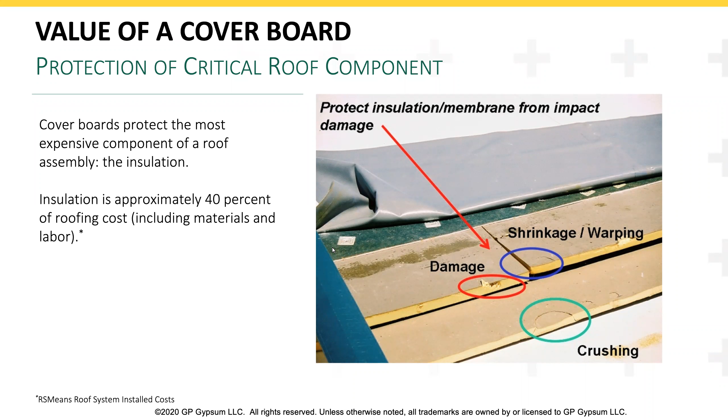So that concludes the presentation section of the program. I hope that you got something from the information today, and when your next roofing project comes up, you remember that a cover board can help you extend the life of your roof, reduce the cost of ownership, and give you peace of mind by reducing risks that threaten your roof.